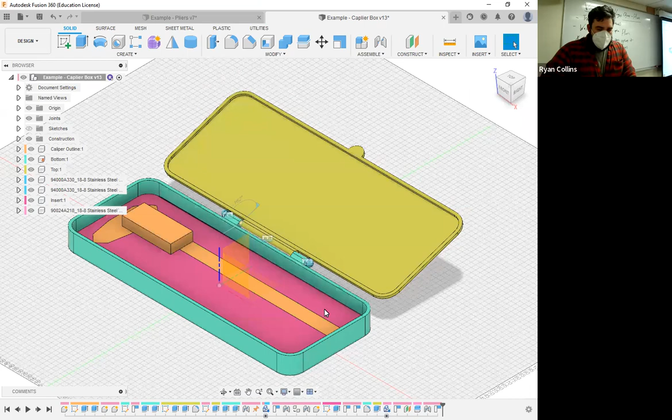But one of the issues is, actually, let me close the lid so we can see what's going on there. But we imported this hardware from McMaster-Carr. Perfectly fine. But what happens if, hey, I really like this model, I want to print it, but I don't want to have to order specialty hardware? All I did is just capture the new position for closing the lid. Well, let's generate some stuff that you can use.

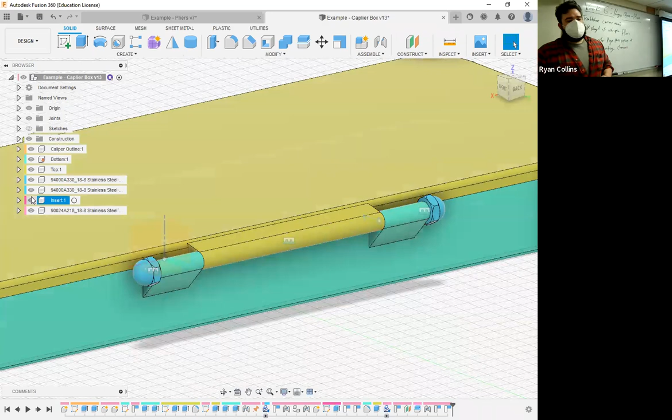So first, I'm going to hide the hardware, which is the stainless steel rod, or the stainless steel acorn nuts, and the inserts there. The insert's actually inside. So, all right. So what I'm left with is just a hole. So you could literally just design this as a pin, or something like that.

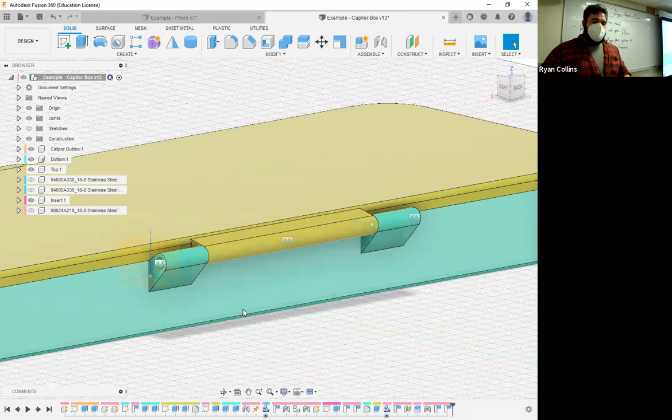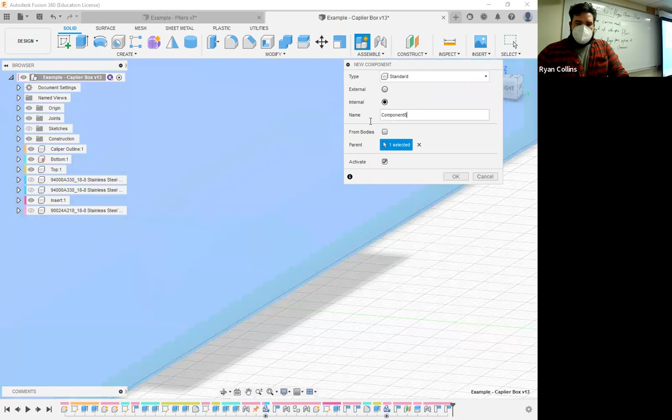So what I mean by that is, let's double check, inspect. How big is that round? I forget. That is diameter of 3 millimeters. Great. So let's start a new component. New component, empty, and I'm just going to relabel this as pin. Okay. And what I'm going to do is draw just a simple pin to go into this hinge. So start a new sketch.

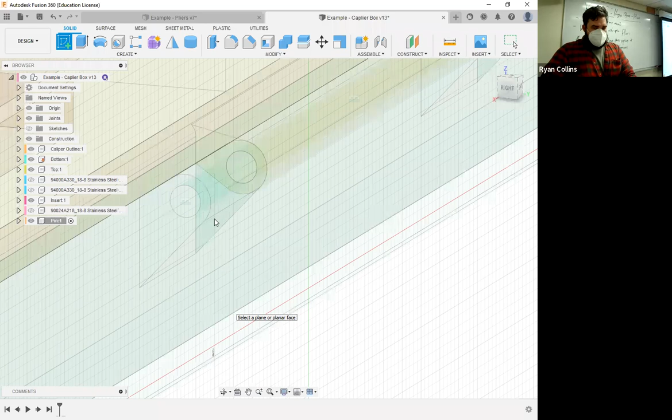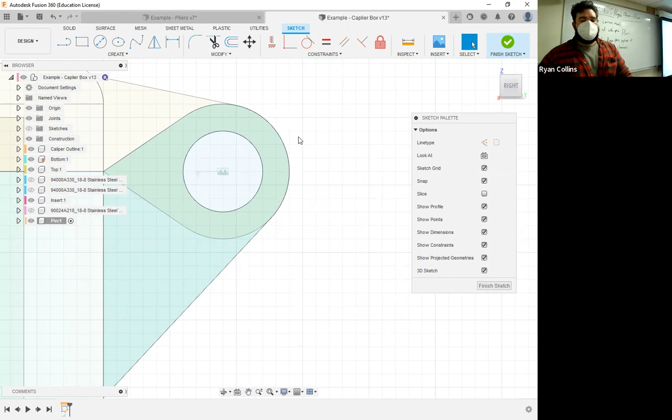Instead of starting on one of the planes, which you totally can, so that it fits, I'm going to use the face of this hinge that I've already built and draw on top of that. So let's select there and just go to the center here. All right. So basically, I'm going to make a pin that looks like a standard nail, which honestly, you could totally just use a standard nail if it's long enough. But for here, let's make a couple of circles.

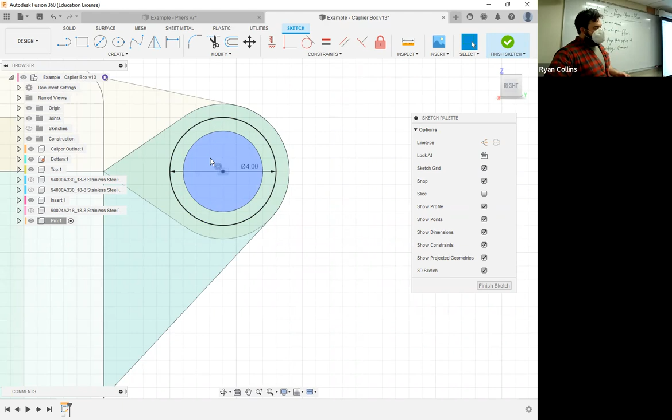Now, one thing to be aware of. You can print parts, of course. But depending how you orient parts, it will not print perfectly smooth. Because you are using an extruder, basically a hot glue gun squishing out hot plastic, it's going to droop a little bit when trying to make something round. It's not going to work perfectly, but it will work pretty well.

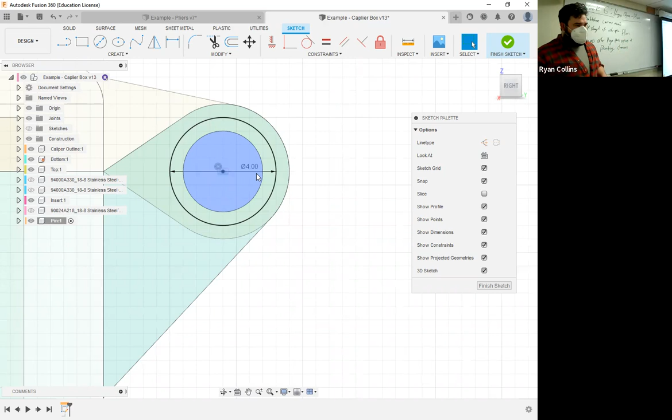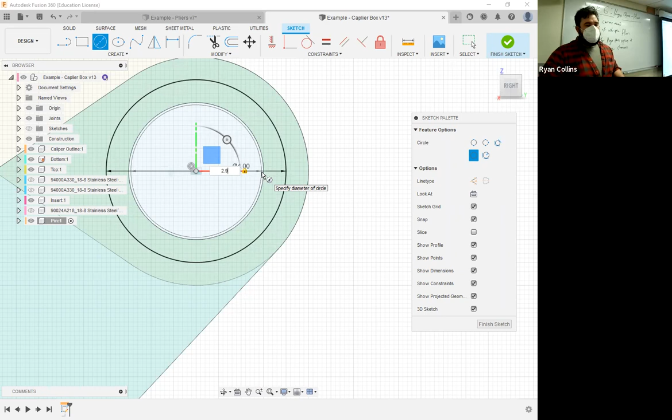But to compensate for that, a good practice to get into is don't make it exactly the same size. I'm going to make another circle here, and the actual size is 3 millimeters. Let's drop that down a little bit. I'm going to make this one 2.9, so it's 0.1 millimeter smaller than the actual diameter. That's going to give me a little bit of clearance when I print these parts. So let me finish the sketch. That's just a very simple thing there.

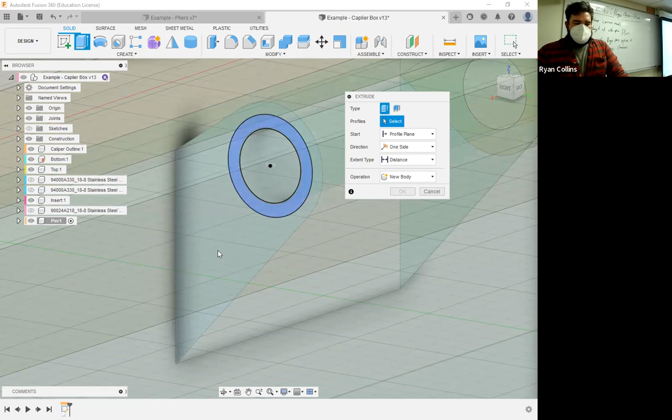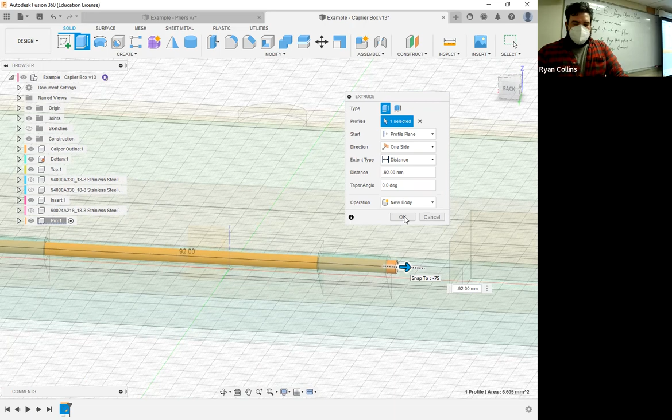And let's extrude that. Let's say I want the pin to go a little bit longer. I should have measured this part too, but to that end is 90. So let's make it 92 millimeters long, so I've got a little tab sticking out there. Great. Click OK.

I also want to extrude the head of that. So extrude again. And of course, it hid my sketch. So let's go down, unhide the sketch. Should have done that before. Grab both of those and go out 2 millimeters. Let it join to that part. Great. So just double checking, expanding down.

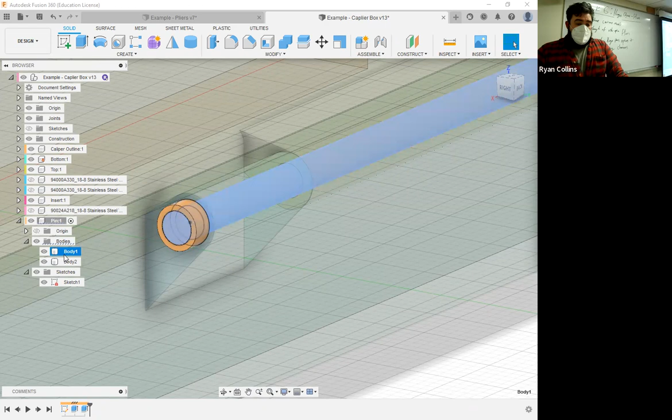What did that join to? Uh-oh. It didn't join. All right, that's weird. I don't know what it joined against, so that might be a problem later. We'll find out. That's very strange. Let's combine those two. I don't know why that stayed as two separate parts. So let's select the target, and the second selection is that ring. Join. There we go. Great. What is going on here?

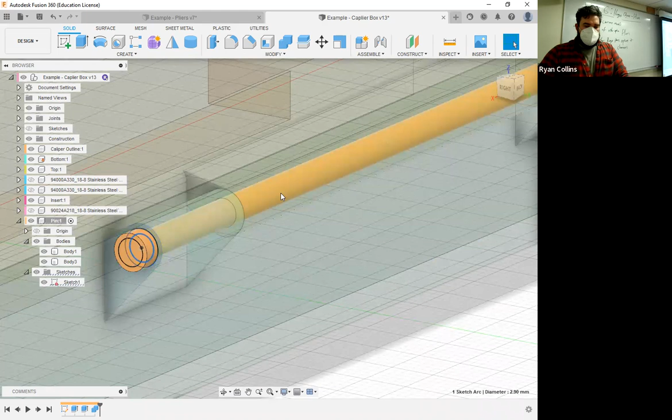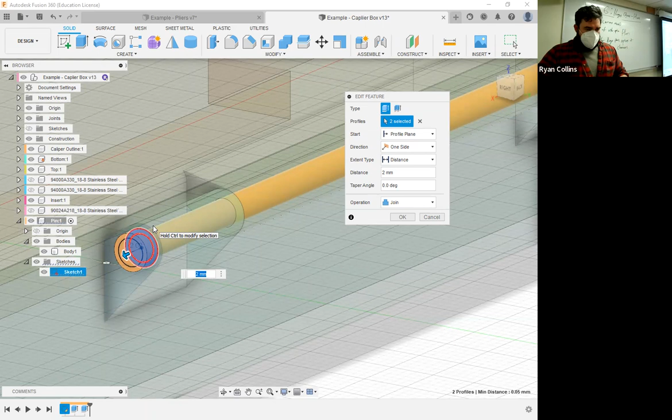I've got a bad feeling, let's delete this. I think when I used the join feature, it actually joined a different component entirely. So remember, Fusion will work against anything that it sees, especially if two parts are touching. So let's hide all the other stuff that I don't need right now, because it might accidentally combine with stuff. So let's use that extrusion. That should work. Join. That is still making two separate bodies.

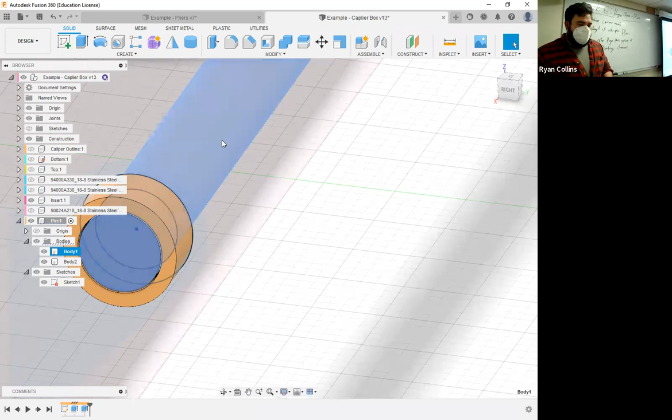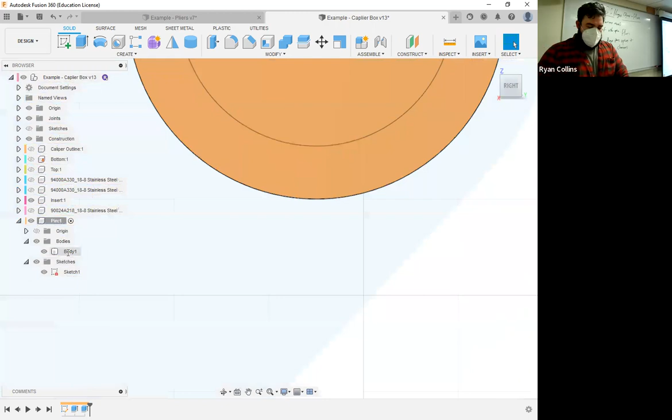Oh, right. Now I see what the problem is. Because I made that internal circle just slightly smaller, if I zoom in, they're not actually touching. So for that second extrusion, I just needed to select that inner ring there. There you go. Hey, now it's back to one. Okay. Pin. So now I have a pin that would fit down into both parts of my box.

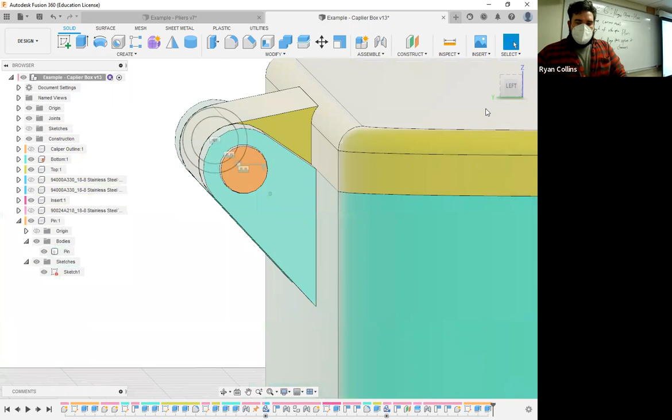Oops. Let me zoom back in. And as I zoom in, you can see that it's ever so slightly smaller than the hinge around it. Now, 0.1 millimeter doesn't sound like much at all. It's not, but it's enough to compensate for the squish that happens with extrusion printers.

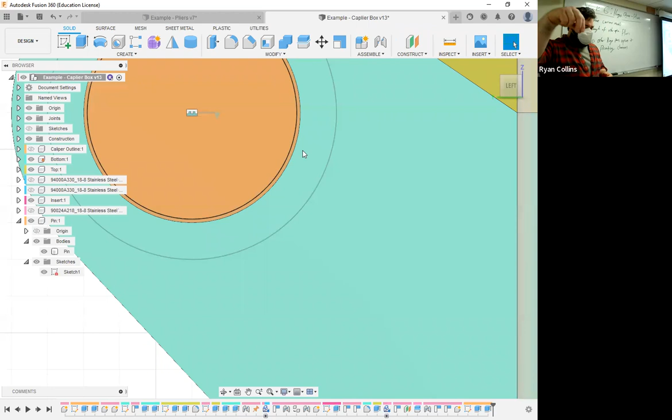Remember, the extrusion doesn't just come out as an absolute straight circle or as an absolute straight line. It squishes out a little bit. It bows out. Now look on the board here. The nozzle is coming out. And let's say that the extrusion is coming out. It doesn't just stay like it's square there. The stuff comes out, and it actually squishes out a little bit.

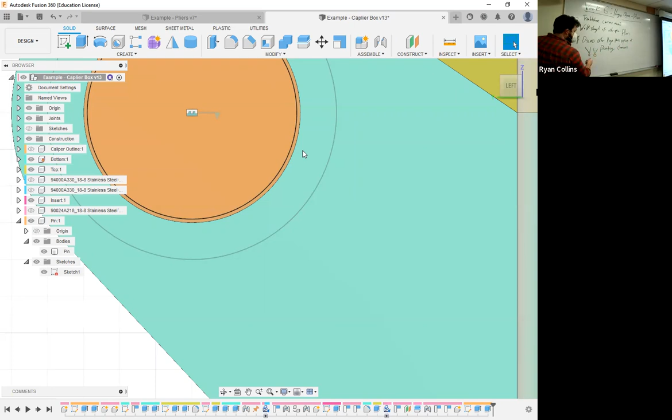That looks like a whole lot, but obviously that's not to scale. So it does squish out just ever so slightly. So adding a little bit of a buffer between parts if you're printing will really help out. Now, do I need to make a gap between the top and bottom? No, those fit together just fine. It's these rounded parts that squish a little bit because they get just a little bit distorted.

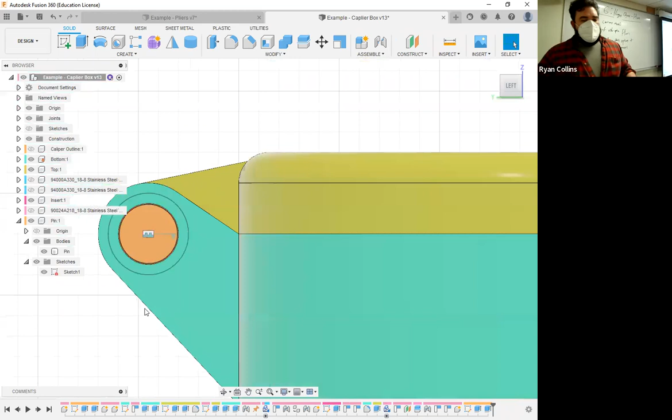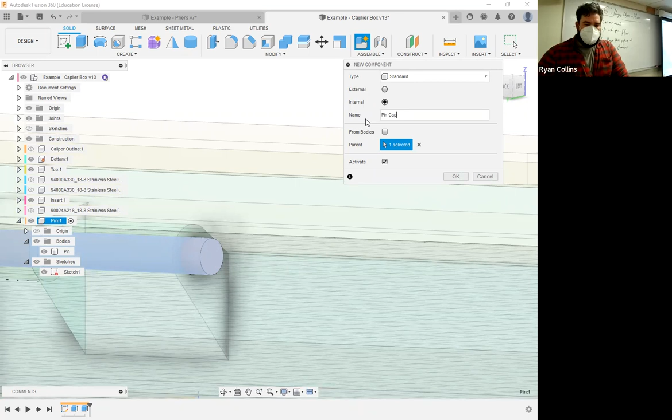One other thing I could do is, since I'm making this in two parts, let's make one more component, and I'll make a cap for this. But I'm going to nest it, so I'm going to activate the pin component and make another component. Let's say pin cap. See, this component is now nested within that pin component. That's not really doing anything else.

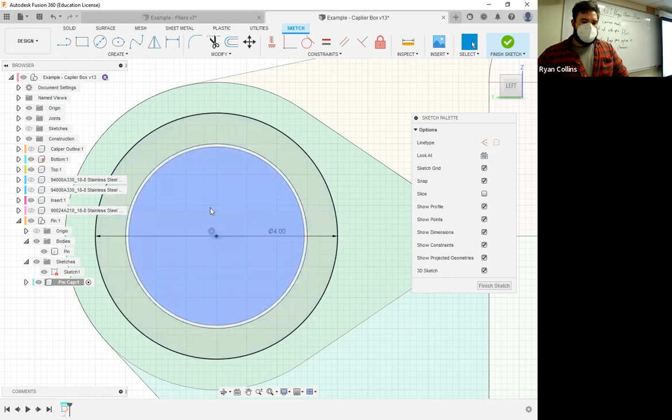And let's make a sketch. I want to make it on the end of there. And what I'm doing here is I'm just going to make another circle. What was that, 4? Yep, 4 millimeters out. Yeah, that'll work. Finish sketch. So I'm going to extrude in one direction up, let's just say 1 millimeter. Hit OK. Of course, it hid my sketch because it does that.

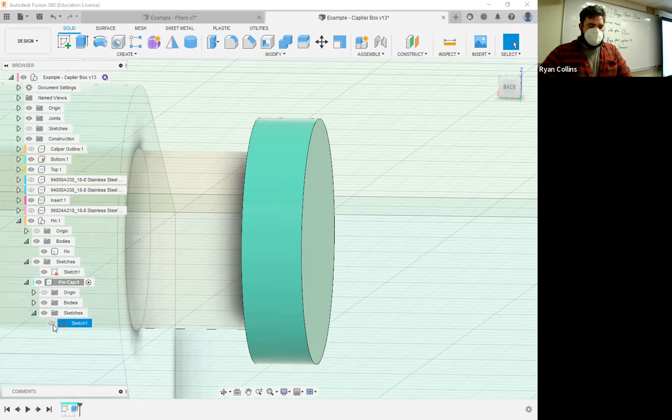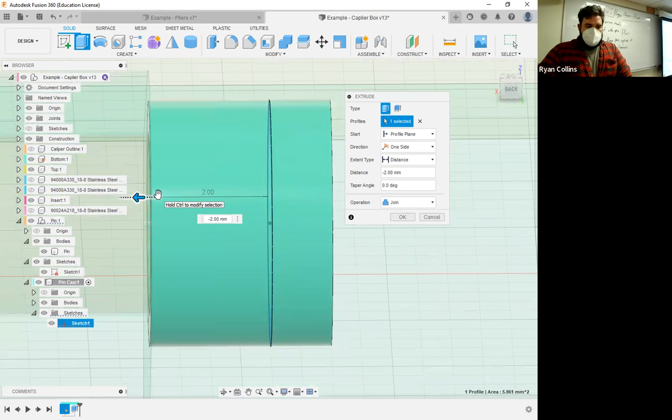And then I'm going to extrude that bottom. And because the rest of that pin component is already there, when I extrude upwards, it's going to automatically cut away that section there. Pretty slick, pretty convenient. To there. And again, I'm going to hide the top and bottom of the box to make sure it doesn't do anything weird there. Click OK. Great.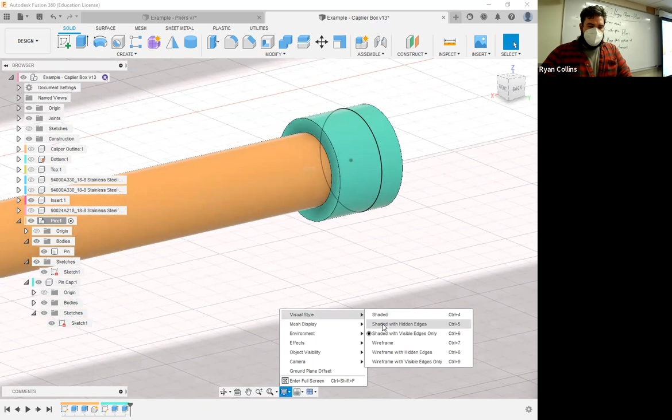Now, when I go and activate that full component, and let me change my view style to shaded with hidden edges, you can see inside, what I've done is I've just made a little cap for my pin, so that if I were to print these two sides, I could just glue the cap onto the other end of that pin so that it wouldn't just fall out of my hinge.

But let me hide the pin itself. And because I extruded it against that pin, it automatically cut a little form-fitting extrusion into that. So it's got a little divot so you can actually glue them back together. It's not just like a cap sitting on top. So a really simple way.

Is that the only way to do it? Oh my, no. There's a whole bunch of different ways, but if you were just doing a direct replacement hardware for something else you could print, a simple pin and cap that you can glue together can work wonders. Honestly, you could even measure out if I wanted to redo.

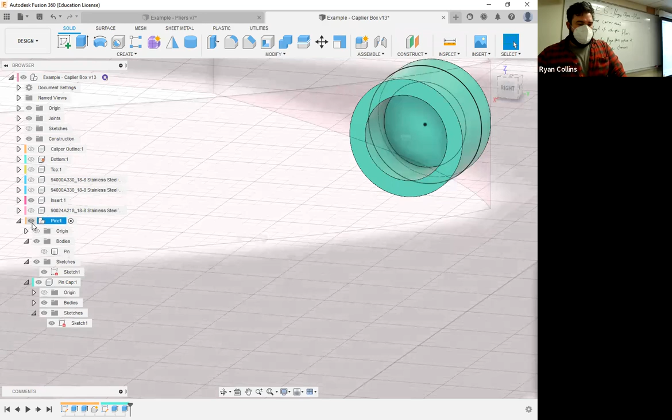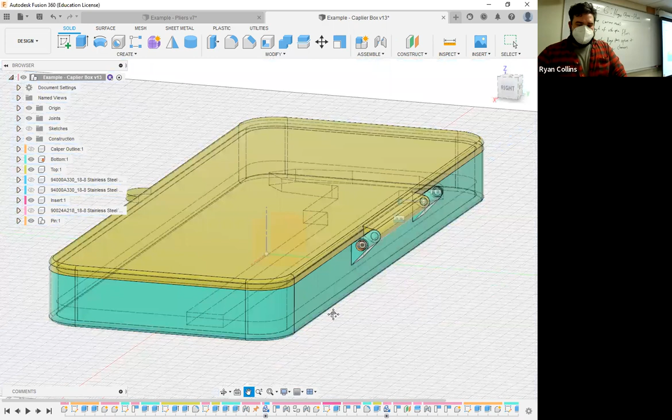Let me figure out what I just hid. Activate the whole thing, unhide all the things, trying to remember what all I hid here. Oh, let's leave those hidden for the moment. Top, bottom, all that stuff. Okay. And let me change back to visual style with visible edges because that gets real confusing real fast. So I made this little pin that you can print separately. Great, but let's hide that for the moment.

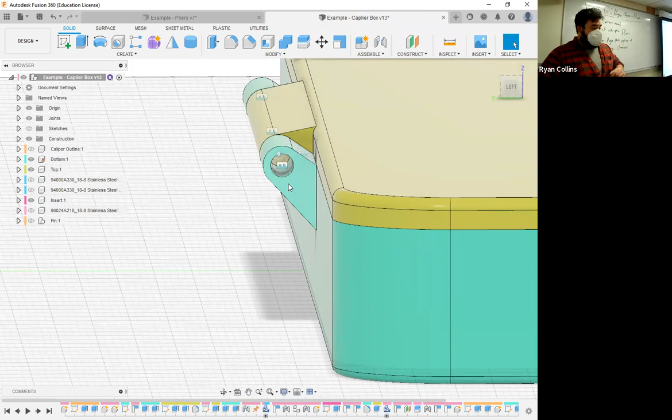And I just want to point out that honestly, you can use any number of things that you can drop in there as a hinge pin. Like I said, if you found a nail that fit, make it to fit a nail. If you made especially a smaller box, you know what you can even use inside of there? A length of filament. So I could use some filament from the printer and just change the diameter of these holes.

The filament we're using is 1.75 millimeters. Make it like 1.8 millimeters, and you can slip a string of filament through there, and even use a soldering iron, or hell, even a dollop of hot glue on either end, and glue the filament from either side. You got a built-in hinge.

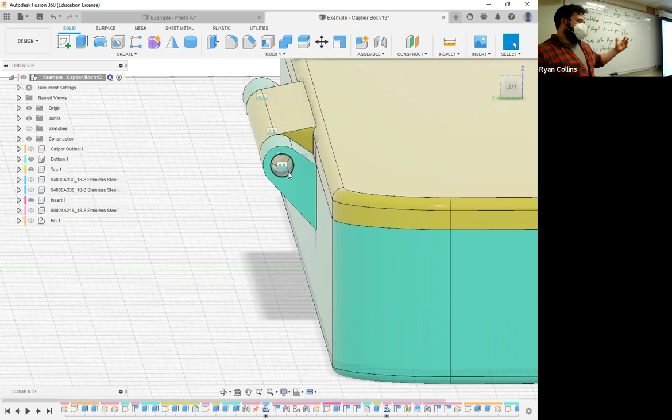So there's a whole bunch of simple things you could drop in, external hardware, even more printer material, or 3D print yourself a part that you can use as an actual component in your own design and 3D print the whole thing. So hopefully that gives you some ideas on different ways you can put hardware into a project like this and not have to go purchase physical metal hardware. But if that's what you really want to do, then I highly recommend it because you've already modeled your project to fit specific hardware. So however you want to pursue it, more power to you.